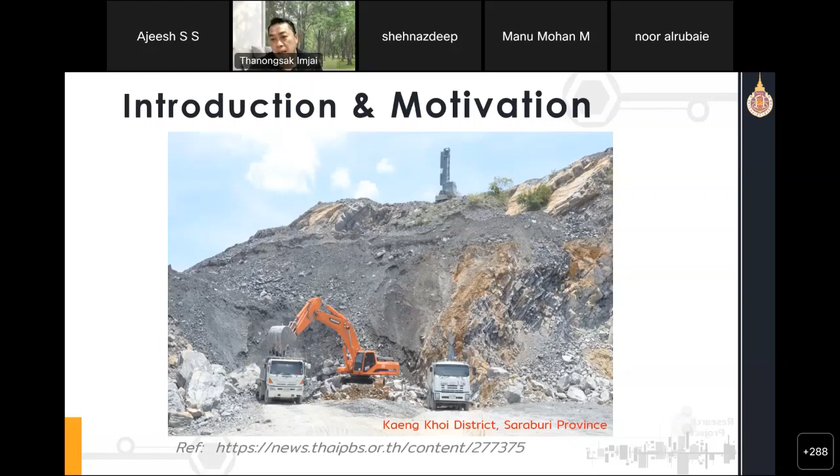This is a picture from one of the Saraburi provinces in Thailand, as you can see here. What happens if we want our children walking around like this, and again it becomes like this. That's why we really want to find some alternative resource to replace natural aggregate. And nowadays it becomes like this. This is one of the motivations that we are working very hard to find a way to work on this research.

Sorry, it's in Thai, but this is from the media. Many people don't want it, and it also creates some air pollution, noise, and things like that.

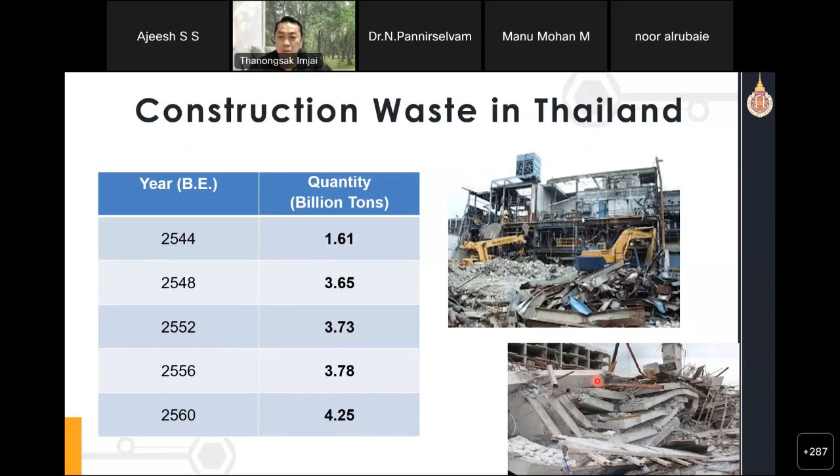As you can see, there is a lot of construction waste in Thailand increasing every year. I think now it could probably go up to 6 billion tons a year. That's a lot. Normally we use this construction waste to fill our land, so there's another way we can reuse this somehow in new construction, or not.

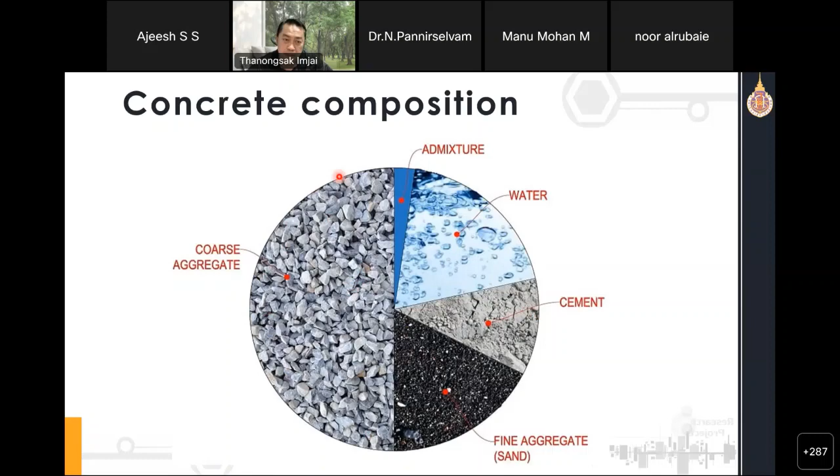So we know that this is a concrete composition. We have a large amount of aggregate, admixture, water, cement, and fine aggregate. So we are trying to find a way to replace this natural resource.

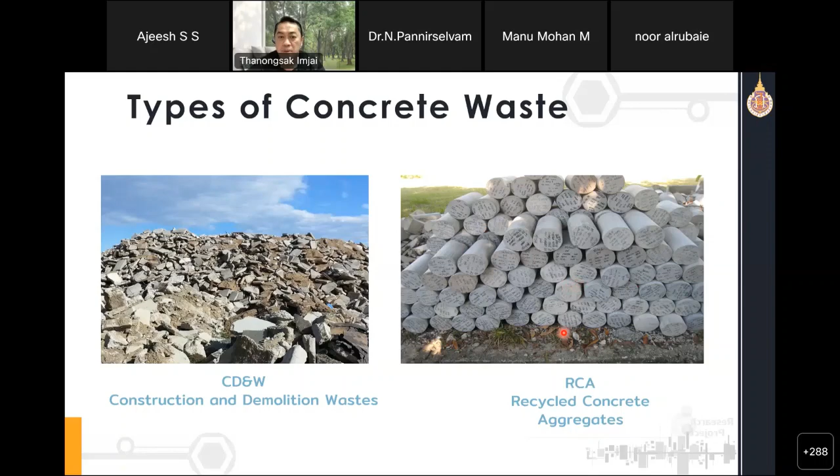So this one is better quality. In Thailand before, we would build the old building, destroy it, and then fill in the land with it. Nowadays we're trying hard to create the code to reuse recycled aggregate for new construction. So this is the life cycle, as you can see there.

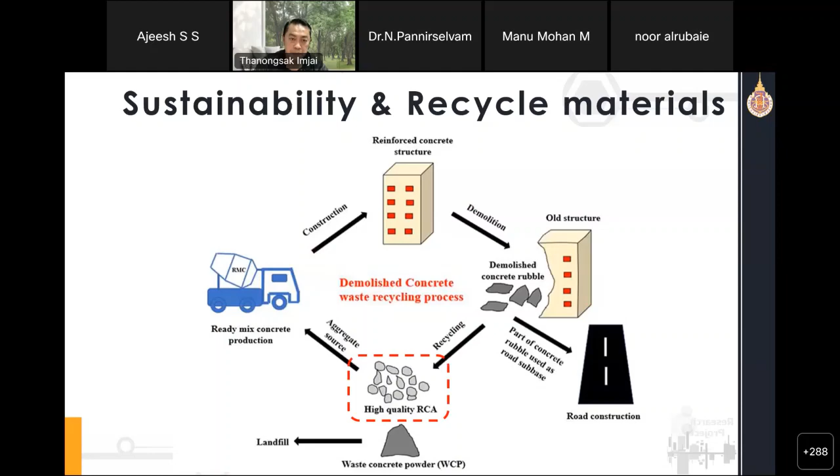This is a bit of the history. I joined Walailak in 2019, and then we teamed up with the previous existing lecturer and tried to find the right mix design. We also applied to international funding, and got some quite good funding there, including international funding for Mitsui, and also the fundamental fund project.

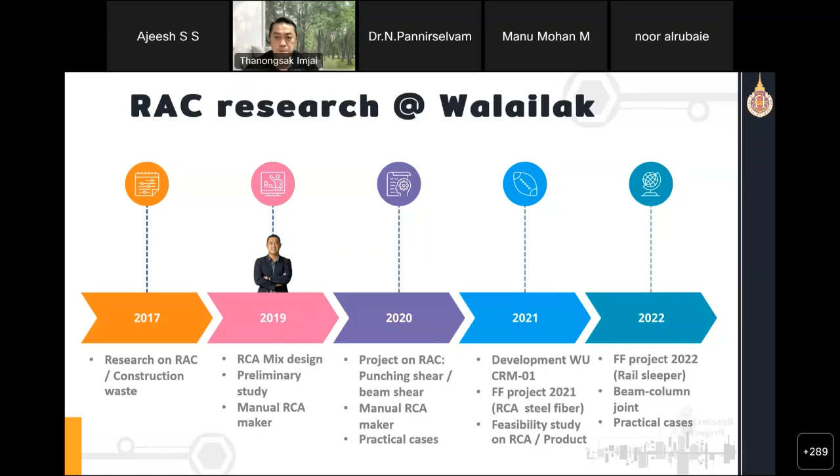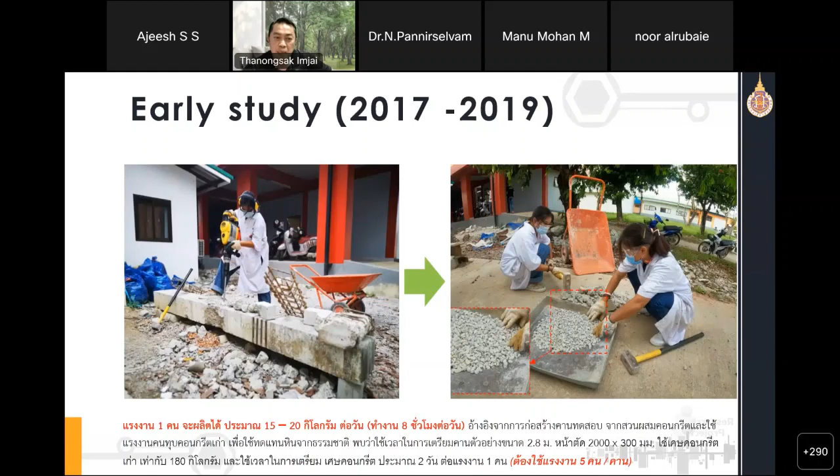In the early days, before I came, students crushed concrete manually, and to get 20 kilograms you needed 8 hours per day. That's why I looked at the concrete crusher machines on the website, but they are really costly, quite expensive, and you also need to form the board.

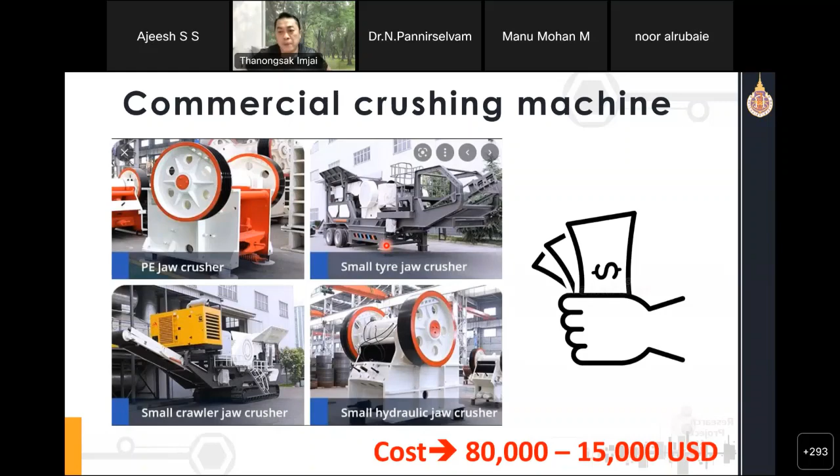This is my motivation - like a crusher machine. So if you can have some jaw crushers together, you can push the concrete, getting the concrete crushed to various sizes. That's why.

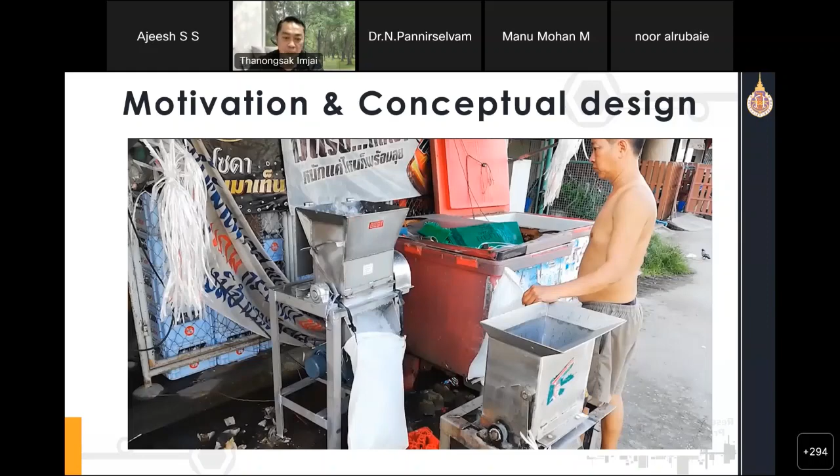This is the conceptual design. Some of you may order ready recycled aggregate from the industry, and some of you may think to invent one in your own school or university. This will be the option, and the cost is very low, and you don't need very high labor force.

I spent like $1,500 to produce it, and local labor can carry out this conceptual design. I got this about 2 years ago, and this machine can produce 5 to 25 millimeter diameter aggregate, with a production rate of not less than 1 ton per hour, meaning you can produce a lot compared to the conventional way.

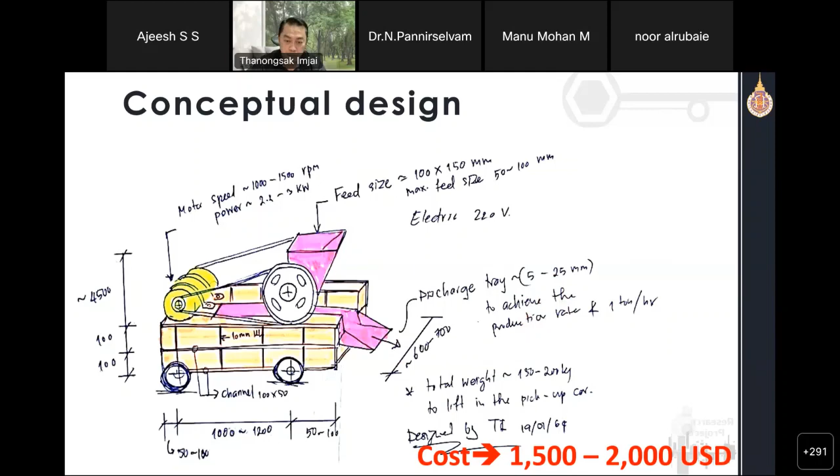This is the first prototype that we produced for our research, and it's fully licensed to Walailak. We already got orders in the UK, and one from a local university in Thailand to make this. This one is really low cost compared to ones from abroad, and can produce up to 3 tons per hour depending on the size.

I will show you very quickly about it. Let me show you.

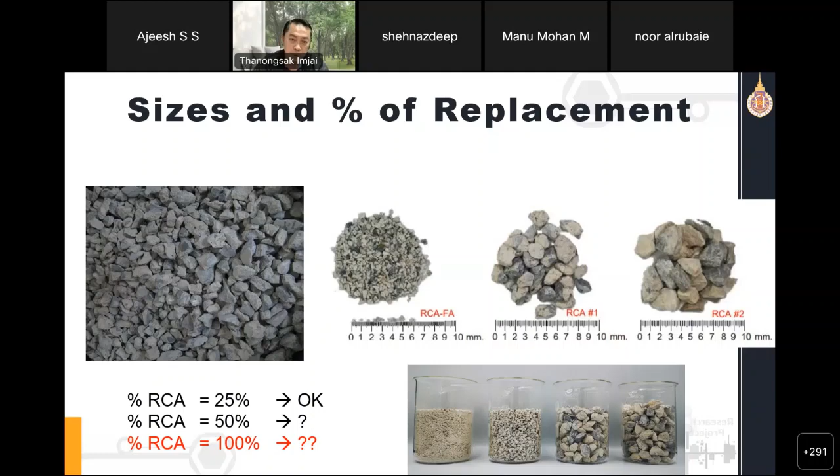The question arises - if you replace normal concrete up to 25 percent, is that okay? What happens if we push a lot, very high content, up to 50 or even 100 percent? That's why it comes to our research, and also to know that the unit weight and water absorption is much different from the normal aggregate as well, as you can see there.

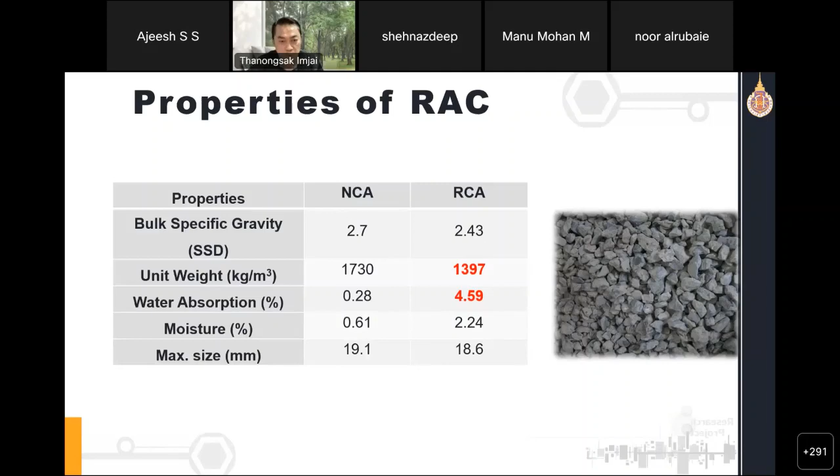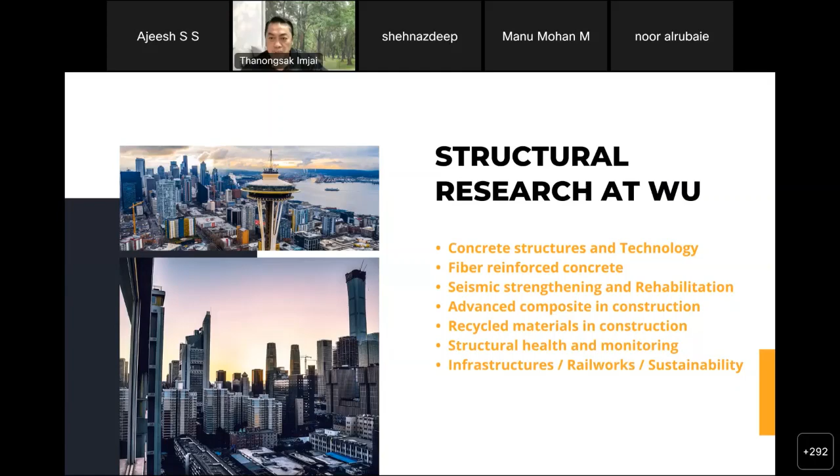So this is the main area that we have been working on using RCA at Walailak and Thailand - concrete structure, FRP seismic, recycled concrete, health monitoring, and also other work. I will show you the research we're working on, internal design and also strengthening as well.

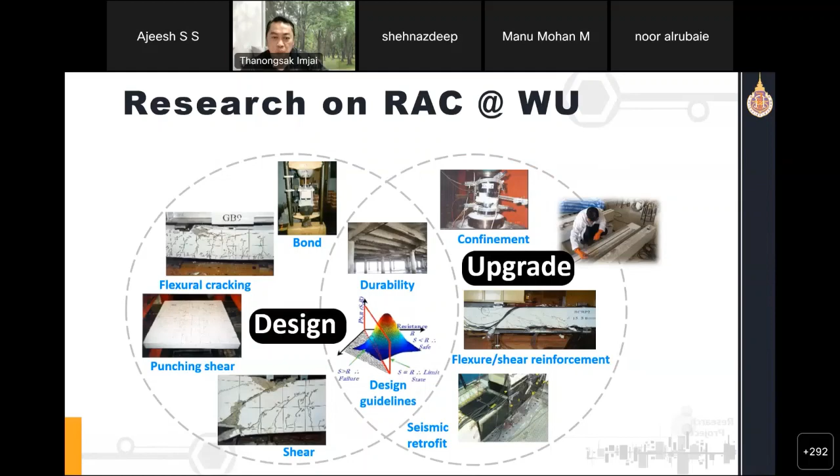First, let's go to the chair - the combined use of recycled concrete aggregate with steel fiber. We try to add steel fiber to improve both ductility and toughness. We added fiber to the beams, and we try to propose the shear crack induced deflection model - if you search my name and put shear crack induced deflection, you will find the paper, it will be in the Engineering Structures journal as well. The results came really good, and the industry used our mix design to prevent punching shear, so we add this for the slab.

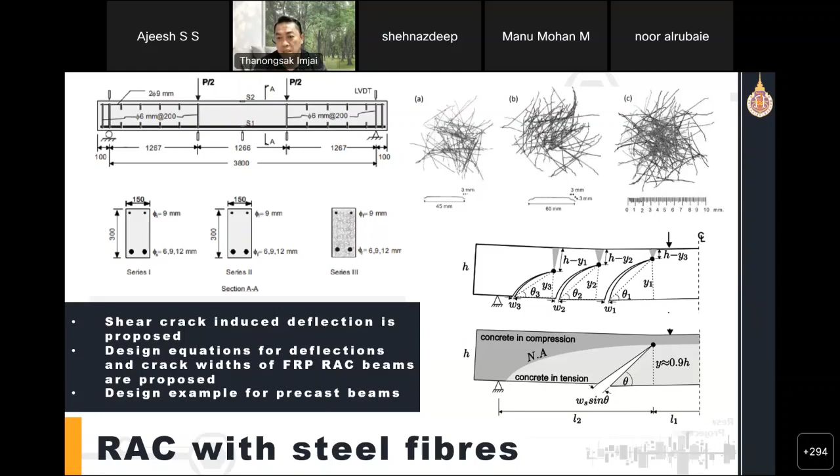Okay, and then we extended to the shear beam, as you can see tested up here. We cast this, and I think this one is already published in Buildings journal, and we just finished it yesterday.

This is for punching shear. So we cast 3 series. The first series is normal concrete. Second series is 100% recycled aggregate, and also we have some opening as well. The result I did not show you here because it's in preparation and going to publish very soon. But to know that we are working very hard on the shear behavior, and we also propose the modification to the ACI code as well, to incorporate the use of RCA.

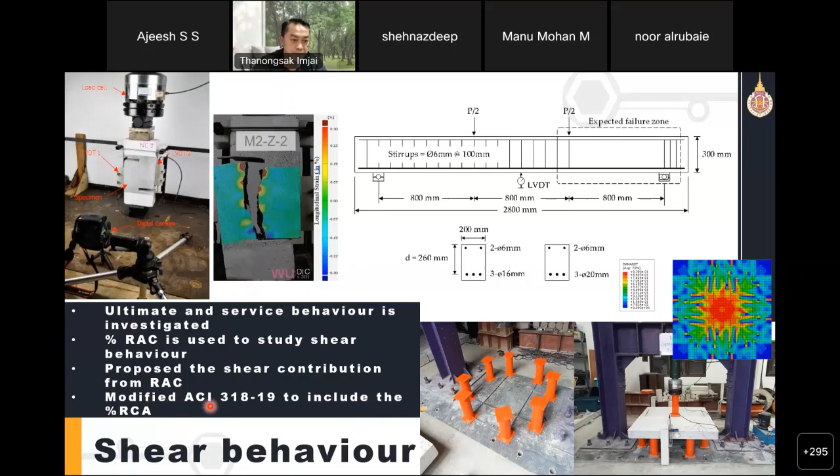In terms of cyclic loading, we have a very good cyclic loading arrangement here. This is the full-scale exterior part of this beam and column. So we turn it over, we apply the cyclic load there, and see what happens. And after that, we repair and then try to strengthen it with the post-metal strap. And surprisingly, the first crack is decreased, and also the ultimate behavior is better compared to the unstrengthened one.

And this is where we run a check just to check the strain inside the reinforcement. So this work is ongoing, and one of my PhD students is working on it.

Not only that, we got interest from the industry working on steel structures. They come to us and they want to build what they call the composite beam. So basically, they want to build a precast concrete beam using RCA with different dowel patterns like that. So our work is trying to investigate the best performance of different shapes, and we come up, okay, modified clothoidal cut is good. Imagine that if this is built for like 15 or 20 meters, for bridge repair, you can install it directly without stopping the traffic, or even install it for the rail work, and you can let the traffic underneath go by.

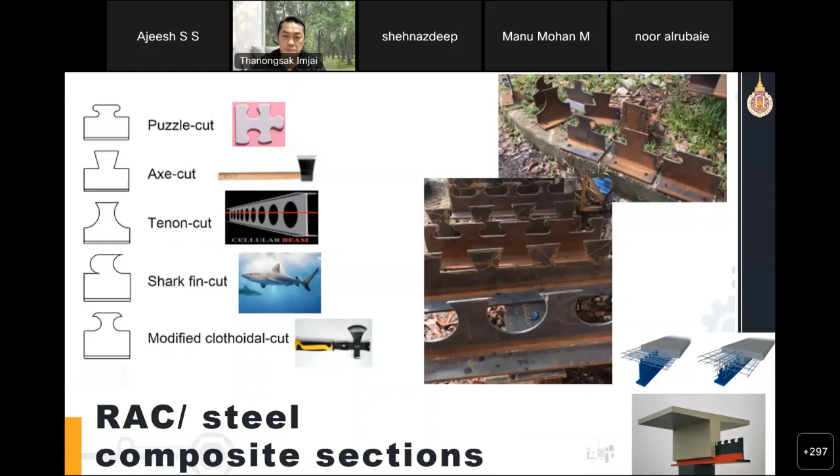So this one is already published. You can just search my name, with the steel section and the different dowel pattern. We also do the coupon test as well, looking at individual dowel performance. And again, when you see the result, this one is very good because of the anchor. We measure the deflection, slip, and also the strain distribution along this region using several strain methods.

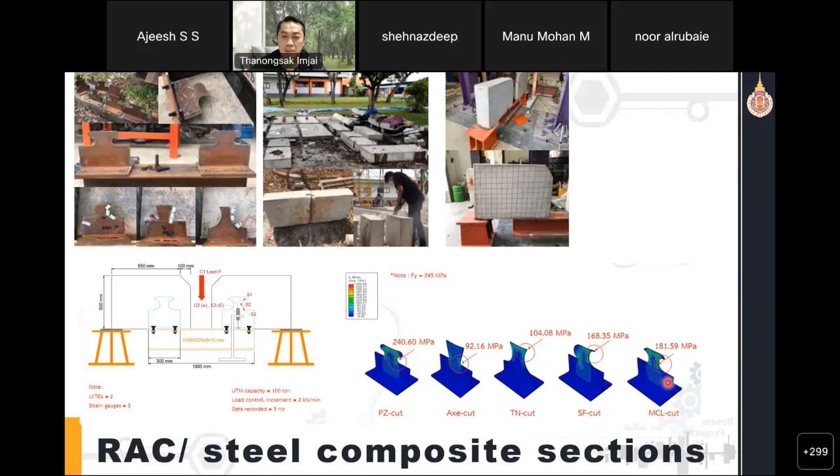And this is the test setup, and you can see there the one with the shape up there. Okay, so we already signed the patent, and are also working with the industry for the precast unit. This one we built up to 12 or 15 meter range for bridge repair, and it's good for installing very quickly compared to the conventional way.

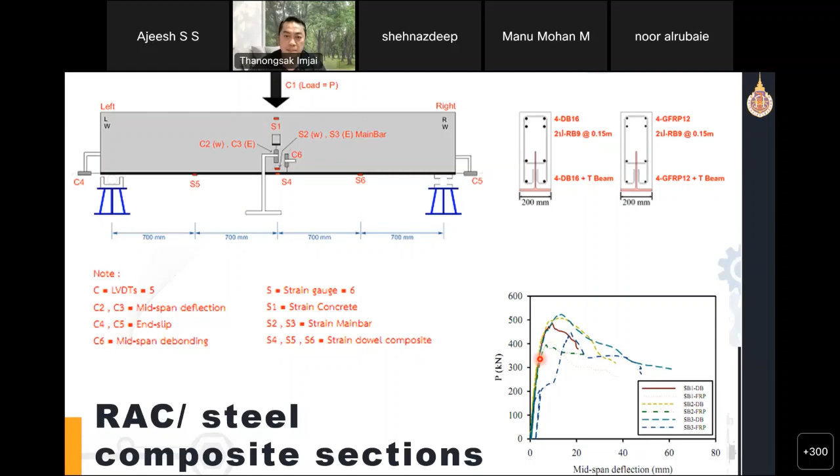We also work with the industry again. They come to us and ask us whether it's possible to use the recycled aggregate together with the metal deck. Okay, the guys have really large old buildings, and they demolish them, and then they give us the concrete, the old concrete. So we cut it, and then we put in the metal deck to create the composite section.

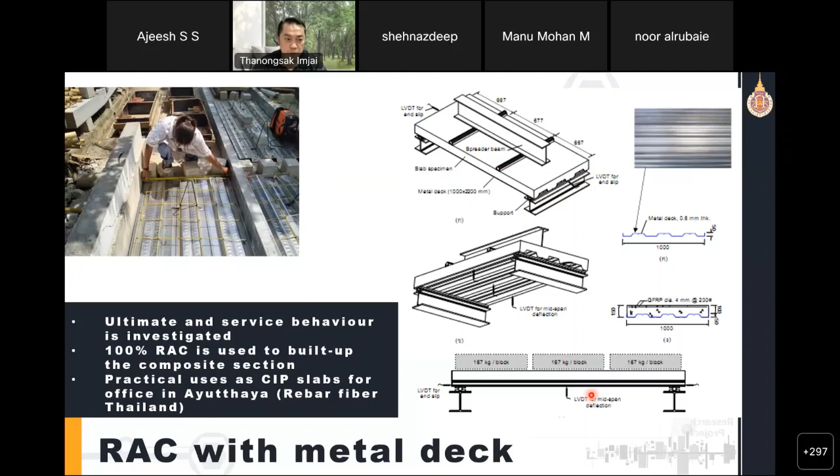So this is the test section. We did the ultimate loading test, and we did the short-term loading, and we have long-term loading as well. Okay, and we also try to investigate in terms of creep. We leave it for 90 days, and we try to induce like movement and vibration. We have the accelerometer measured here, and it's found that it's good, also within the acceptable range.

And this one is going to be published very soon. So I can say that if you don't use this for like column joints, but if you cut for the slab or even the precast unit, this is okay, or the RCA level up to 50% or 100%.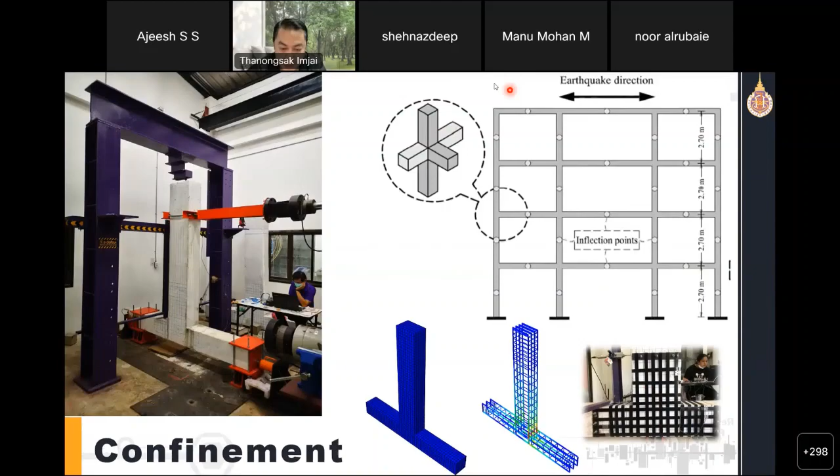The first question is from Amina Dekak. She asked: since the pH value of aggregate due to carbonation of recycled concrete can be lower, did you investigate corrosion of steel-concrete composite sections? I'm trying to read because I cannot hear you very well.